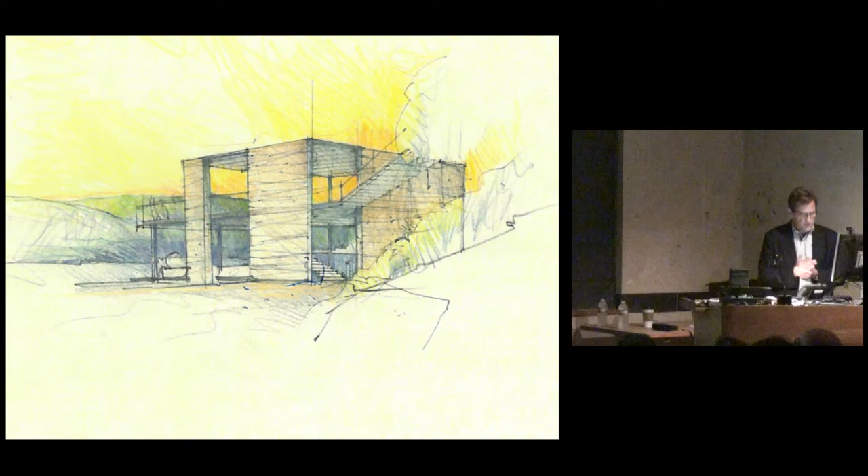On the lake, the first notion we had was that while this image looks very geometric, a simple box, the idea was that this building would be made out of what almost seemed like the detritus of a flood or a rotting stump—something big and kind of imperfect.

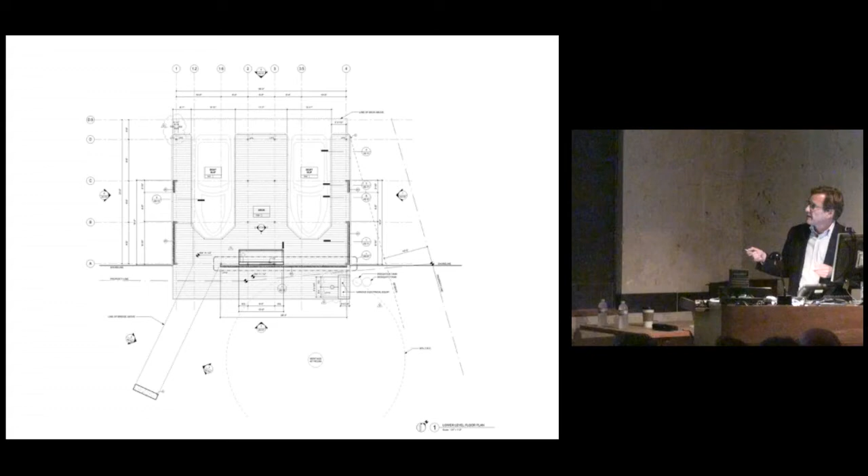The program for it was two boat slips down below. Upstairs there's a bridge that goes to a little arrival spot, and then a kind of living room, and of course a bar that's as big as the living room, which is important, and an exterior space. One of the things we do a lot in our work is make the exterior spaces, especially in climates like Austin, kind of as big as the interior space.

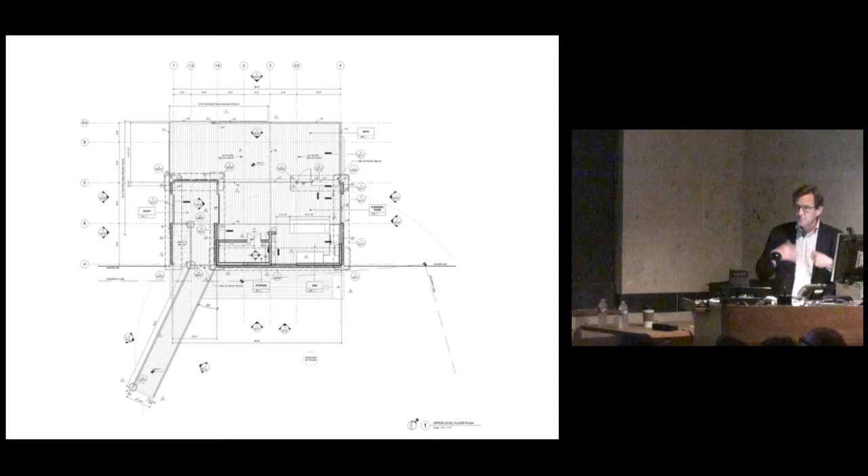What I'm going to walk you through is how this wall and this wall transform to make these rooms all combine as one or separate as distinct rooms.

As you move in, you can see this become another—Chris and I, as mentioned, both worked with Charles Moore. Another notion Charles brought to the table was this idea that buildings are repositories of our energy and repositories of our memories. For Blake and Heather, this was a kind of memory palace, a place they could bring back things from their travels.

Our work starts with rough sketches. I've got a couple of mine in here that just conceptualize the space, and then they go to ones that aren't really much more refined than the rough ones, but these are the ones we begin to talk about our notions with the client with.

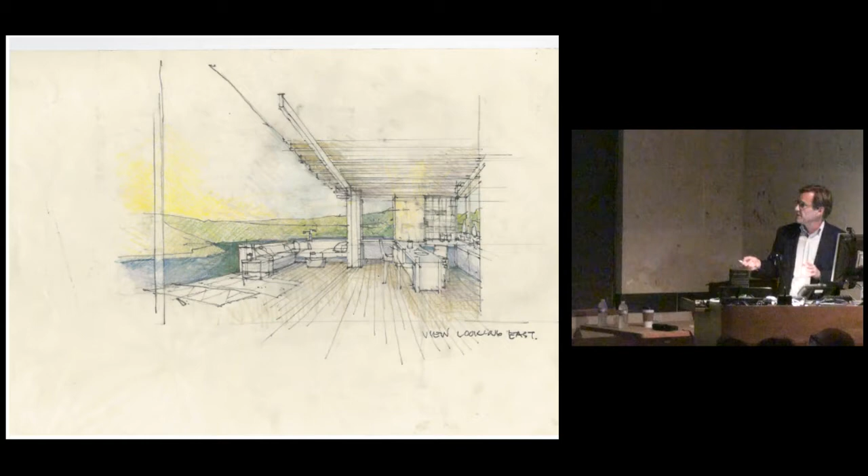This sketch talks about how there's a wall here that can all be removed, so that this can be not a conditioned space, but a screened-in space free of bugs, and then an outdoor space—a simple concept like that. It eventually evolves into the actual construction of the building.

Likewise, the bar I mentioned earlier started with an idea that if you sat at the bar and we put a bunch of mirrors here, you would be, depending on how much you had to drink, unsure if you were looking at the lake or a reflection of the lake. They really got into that idea.

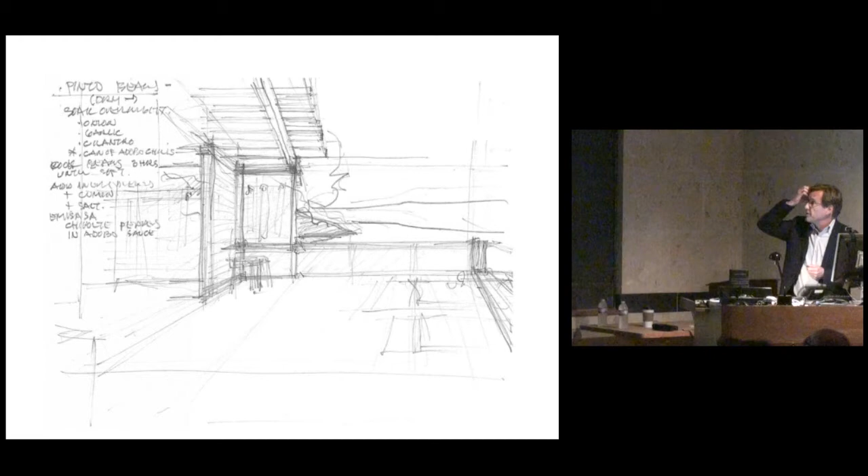For some reason, I wrote a recipe on this sketch for pinto beans. Chris, this is Merce Whittington's recipe—she was telling it to me on the phone while I was going. It's not essential that you do that, but...

About this outdoor space—you can see that in our office anyway, there's a lot of hand drawing, as Chris mentioned.

And that's what produces what we're doing. So we then went through a series of studies of what is this fenestration, what is this rotting stump on the lake, and how's that made?

And we began doing images. Our first notion was that it was willows. The clients didn't like this—they didn't think it was local enough. We thought it was terrific, but there were some qualities of light issues in some of the mock-ups.

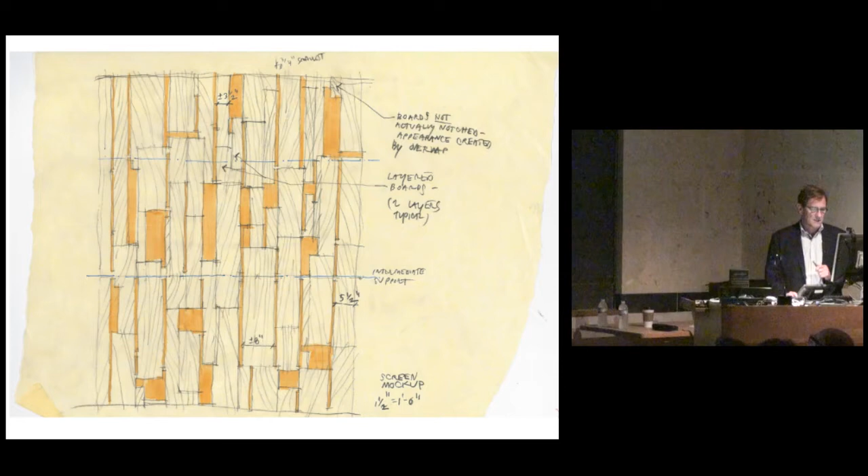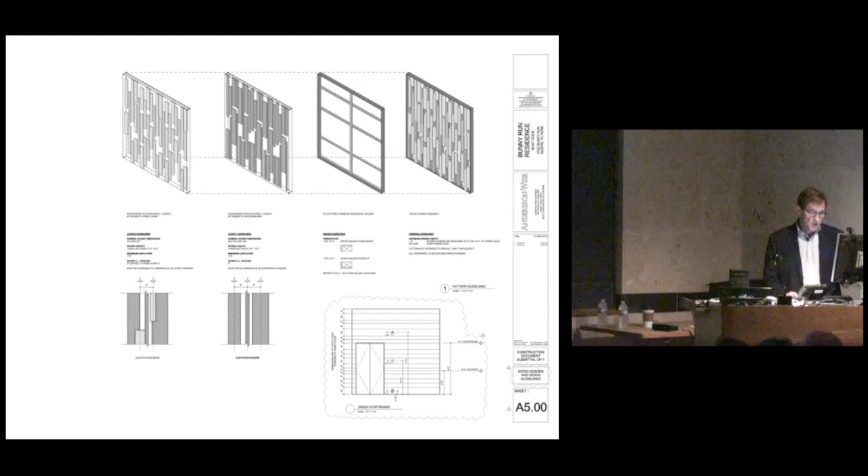And then we went to a larger format of boards, and Chris swooped in as he normally does and made something that can actually be built, with some kind of drawings. Then we did a number of studies on how to construct something like this, to make this kind of wall within a frame and have a screen, things like that. And a number of mock-ups were done.

So I'm showing you all this to reinforce again what Chris said about the process being collaborative. This particular project is interesting, I think, because it's kind of messy. It's not a pure thing—it's more about these little sticks that we found and put together. But in combination, they make for something that's intriguing.

They brought in a rug and said, we want this on the ceiling. We said, okay, well, it's going to rot if it's on the ceiling. So they said, no, we want you to do the ceiling so that it is somehow emblematic of this rug that they found. So we had an artist, a local artist here.

And they came in—this is again part of that collaborative process. This ceiling became the repository of this kind of human energy.

So they went in and literally did the rug on the ceiling, and we debated while they were doing this in our office whether everything was being ruined or not. We determined that it wasn't that precious, and it wasn't ruined. It was an exciting way to finish out the project.

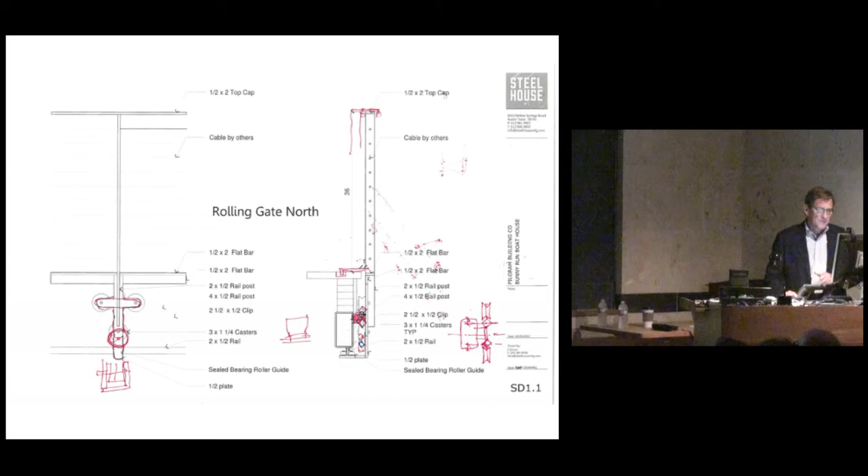So I mentioned the gate earlier. These kinds of things—we love big, movable devices in our projects. We know people that make them well, and so the rail on the edge of this boat dock all slides back. This piece right here slides out to the corner, and the other one comes to join it when you want that, and it moves back so that people can enjoy an open edge for drinking and jumping. The whole thing becomes enlivened in that way.

And I mentioned the screen before. This is from the lake with the room opened, and then it can all become a big screen on the porch if you want to spend the night down there with no bugs. So a couple more slides just showing what the day's end is for this particular project, this particular memory palace on the lake. Wendy.

I really enjoyed working with Chris and Arthur and Mell on this semester, and it's such an interesting thing that the process of creating the studio is as collaborative as the sort of work that's happening within it. Whenever you say group project to students, everybody kind of shudders and pretends like they can't see you, and pretends they can't possibly find anyone in the room to collaborate with. And yet the creation of this studio, us just sitting together to figure out how we were going to create a meaningful semester for the students, was really interesting, and I think spoke a lot about how we all work—that there's an idea, you feed off of it, it generates, and it becomes something that has legs of its own.

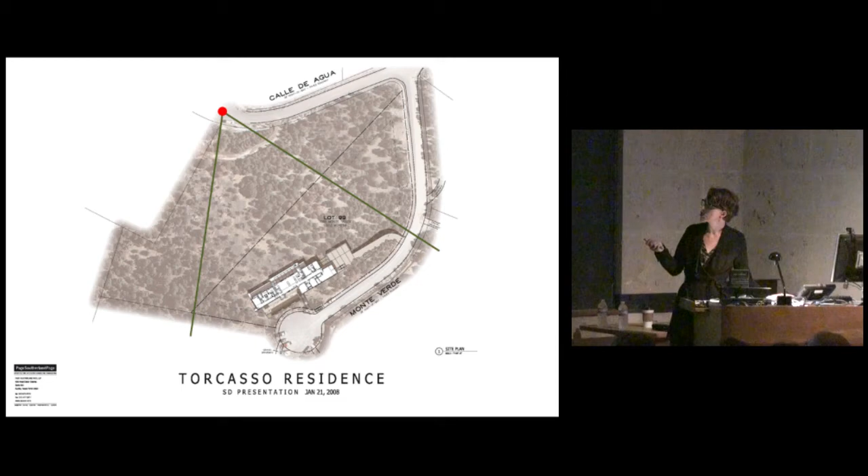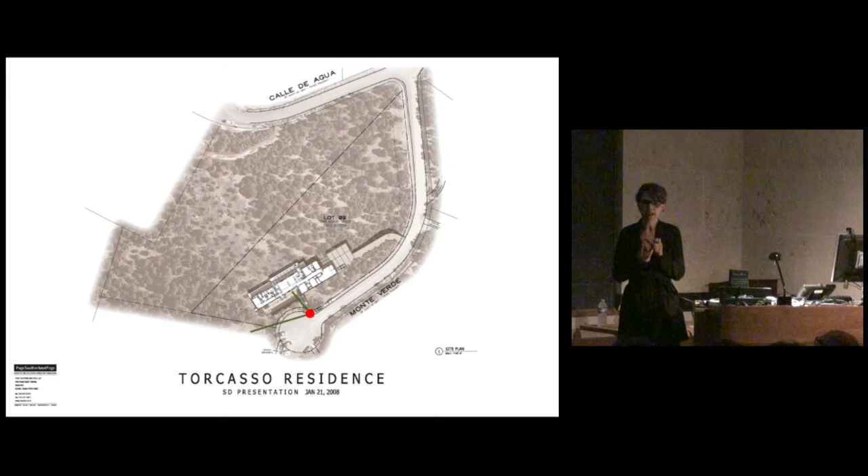This is showing you coming up the road, looking at the long side of the finished house, just to give you a little orientation. This next image is taken from the top, looking down at a small courtyard. What you'll see is this sort of long bar that's set on the hillside and in the hillside, organized by two main volumes.

I came onto the project after part of that language had been created. Our office was collaborating on the interior architecture and design at the time, before I rejoined Page. But this big notion of looking through and out was really, really important.

One of the first notions was there's this beautiful hillside, this fantastic long bar of a building, these absolutely beautiful conceived volumes of rammed earth. And really, you almost want nothing on the inside to interrupt what's happening with that architecture.

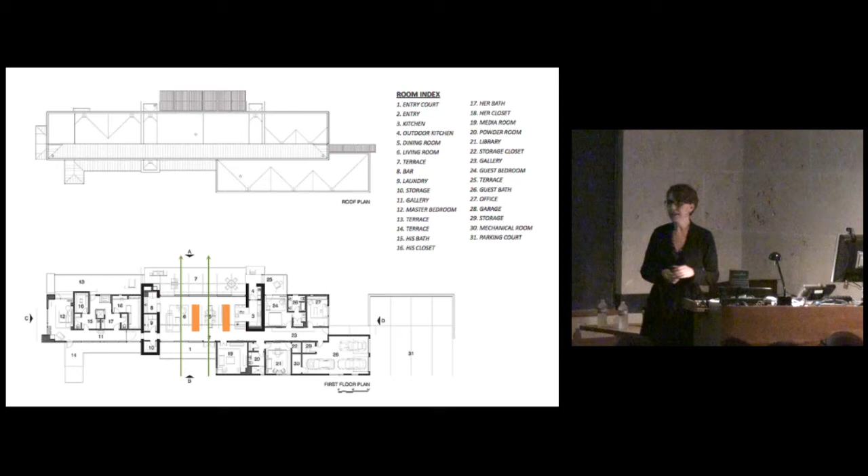The other interesting thing was we had a client who had unbelievable faith in the team, but they also had some very particular things they brought with them. The first person on this project was the lighting designer, selected because they had an art collection incredibly important to them, and some furnishings they were really invested in that were incredibly present kinds of things. So the first person on the project was a lighting designer, to make sure each item was perfectly lit and celebrated in this new home.

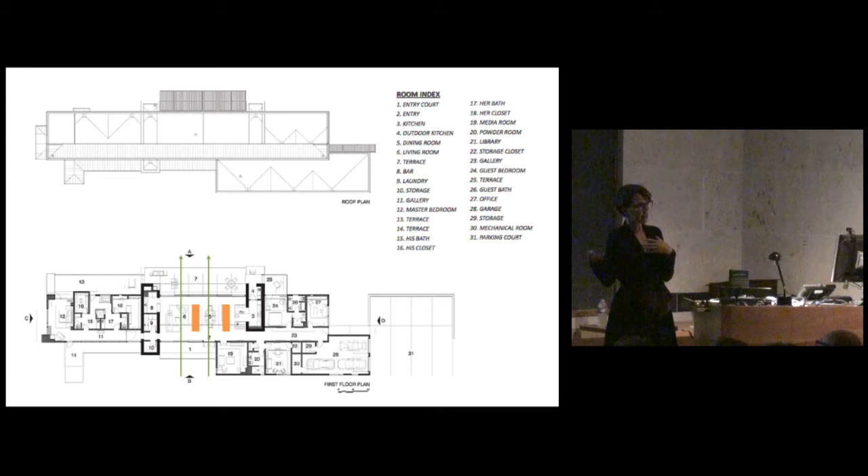But they came from Dallas and were moving to Santa Fe. I don't know if you can connect those dots, but sometimes the things in one place that's quite urban don't necessarily translate to that other landscape. So the other part of what we were doing was, one, not messing up the architecture, but the other was to help knit together this life that this couple had in Dallas, and their art and their baggage and all of their investment there, with this really beautiful home on the hillside of Santa Fe.

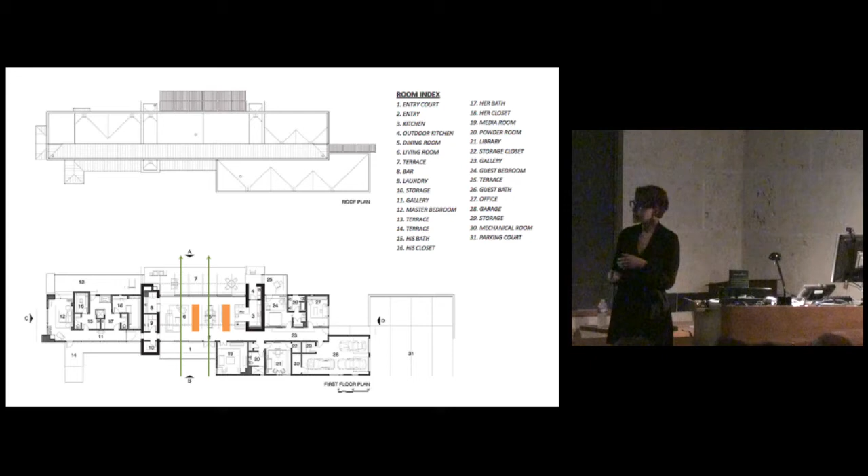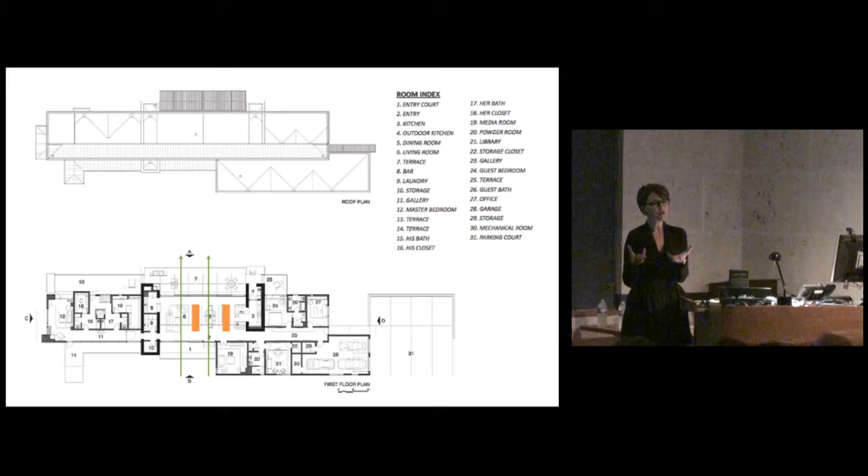That was this interesting kind of collaboration we had with the architecture and with the client, who wanted to give us a really strong voice in the rest of their life in this home, but also had a lot of things they were really bringing with them.

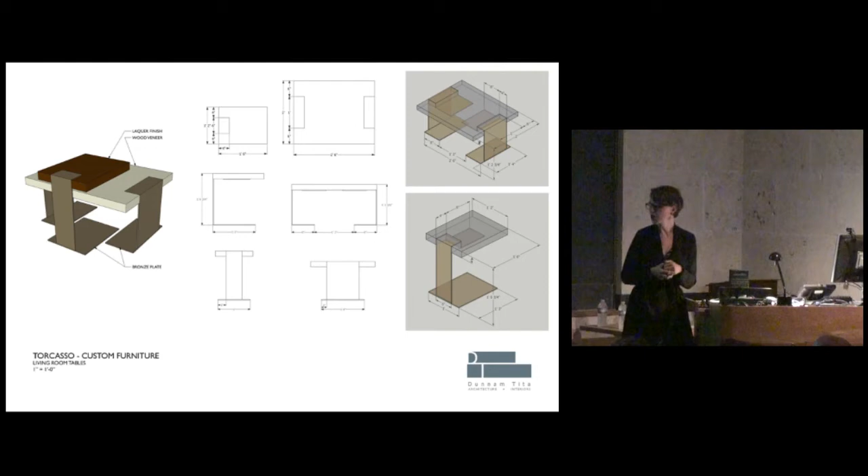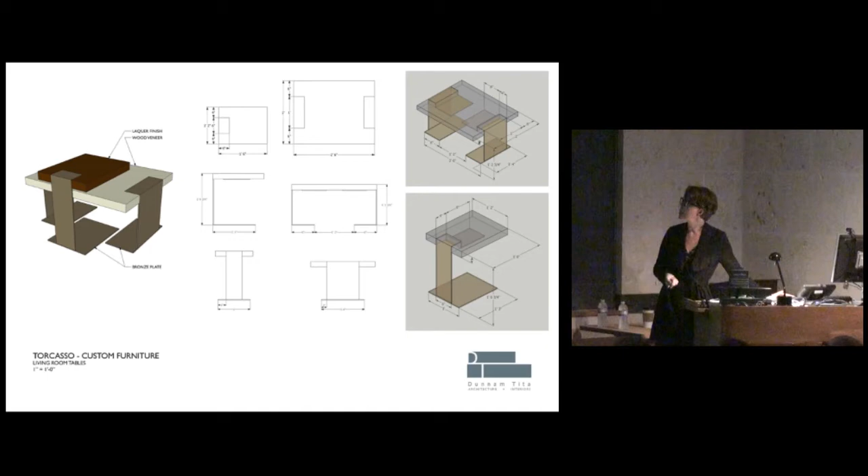It starts with those wonderful rammed earth volumes and the art volumes, and then moving on from there. So we really tried to treat these as a kind of seamless, thin line with pieces of a volumetric table within. And so we have this suite here and this little table to the side of it that we're really happy how they collaborate with the other pieces of the architecture.

The next thing is this kind of funny lamp, which is simple, it's just a really beautiful piece of molded wood veneer. It's called the air lamp though, and when we got it in our office, we just wanted to gaze at it. It was so pretty and sculptural. And then it was just too light and flimsy and it fell over. And that was really unsatisfying.

So we thought, if we took a toilet paper holder and peeled it apart, deconstructed what that shape is and reconstructed it, and then had somebody mill that out of metal and reattached it, wow, it's so much better. In the end, that's a much more satisfying thing to see in this space and a much more quiet connection than the original. That level of energy just helped it be more quiet and pure within the space.

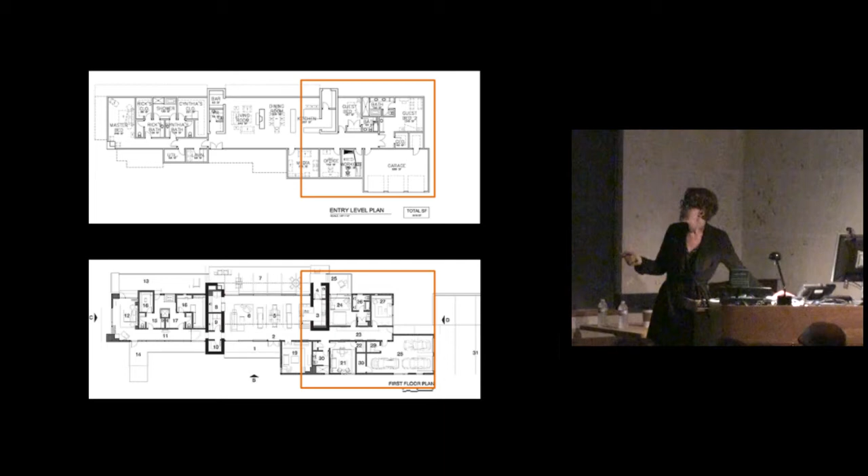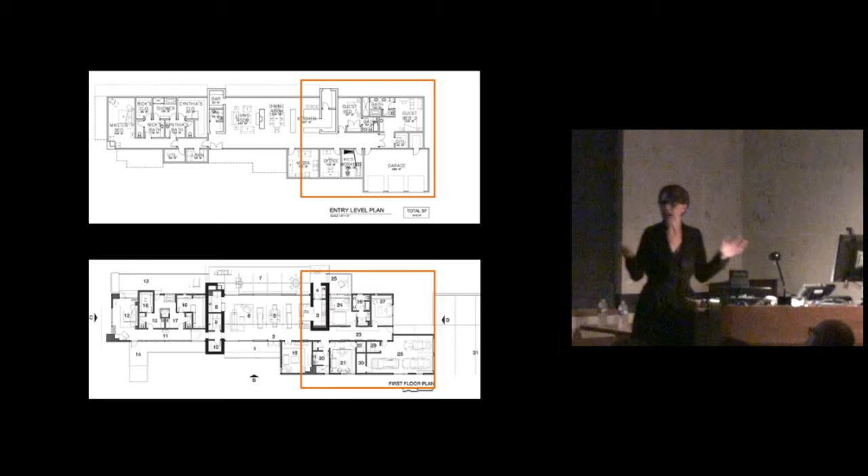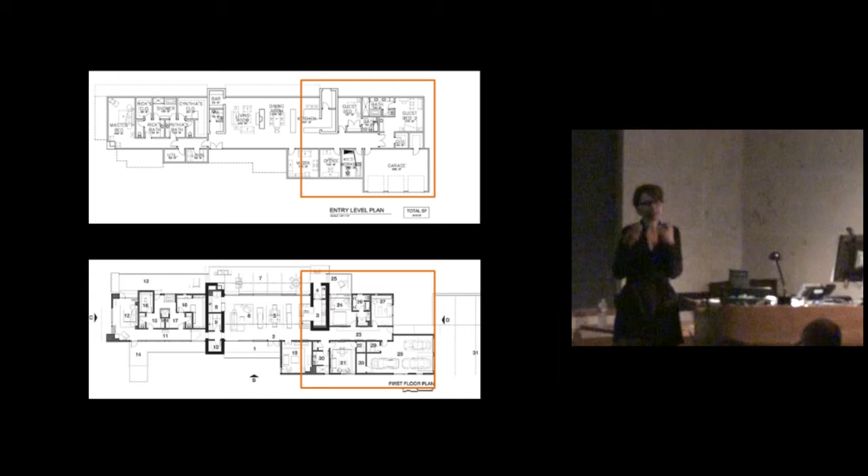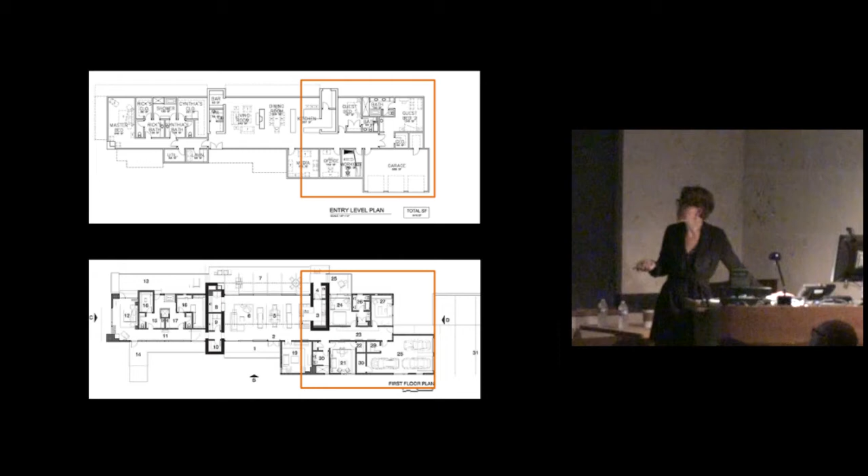We did some reconfiguration also looking back at early ideas. There was this series of rooms that, when we got down to it, had a room full of tchotchkes—but not really. Really beautiful small bits of art that there was nowhere else for in the house. They loved them and cared about them, but didn't want them anywhere else in the house. They wanted a place where they could go and celebrate and enjoy those pieces without them taking over this new world.

This actually has a kind of media security closet—there's a Wii behind it. But mostly it's about these little moments to celebrate this little collection that they had.

Then there was this red lacquer box and this rug, and the idea of, well, what's the new piece that needs to go into that room? So this is another piece we worked on with Mark, which was really about the lacquer table, if you will, as a place to occupy that room.

Again, just looking at some of those other details and how the volumes really play out to celebrate what's beyond. Similarly in the art collection, we had to hold it off the wall so that this light feature the lighting consultant obsessed over—this sort of 60-foot long light trough—wouldn't create weird shadows with the art. So we fashioned a 3-inch spacer to the wall, and all of that worked out.

Again, sort of obsessing on the quiet, all of those little details kind of working together to really celebrate the surfaces of the architecture.

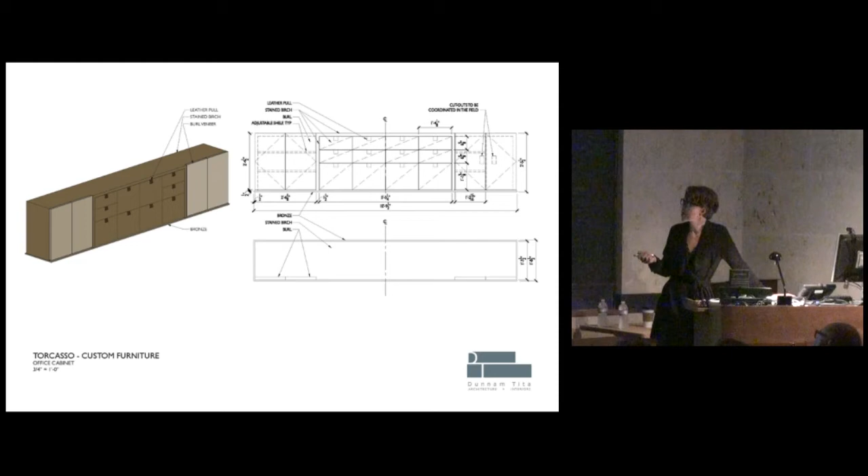Working through in his suite, he really loved bronze. This is the heaviest, tiniest desk you will ever see, and this is a piece we worked on with Mark, who beautifully built it.

One of the details to obsess on was this leather pull, which we wanted to be very satisfying when you open that weighty drawer. Mark sent these different ways of connecting it, and while there's something kind of satisfying and tectonic about one option, in the end we quieted it down, because you really wanted to notice and feel the leather before you notice the connection.

In the end, it extends to every part of the house for us, making sure that the thin line of this whole space was really celebrated, even in the exterior furnishings. Paola Lenti is this fantastic Italian designer, and these are really thin ribbons of steel that she covers, which really allowed the eye not to get trapped by the furniture of that space.

So in the end, it's a lot of pieces that work in concert together. I think when we collaborate, these for us were about how to be quiet and not mess up the architecture.

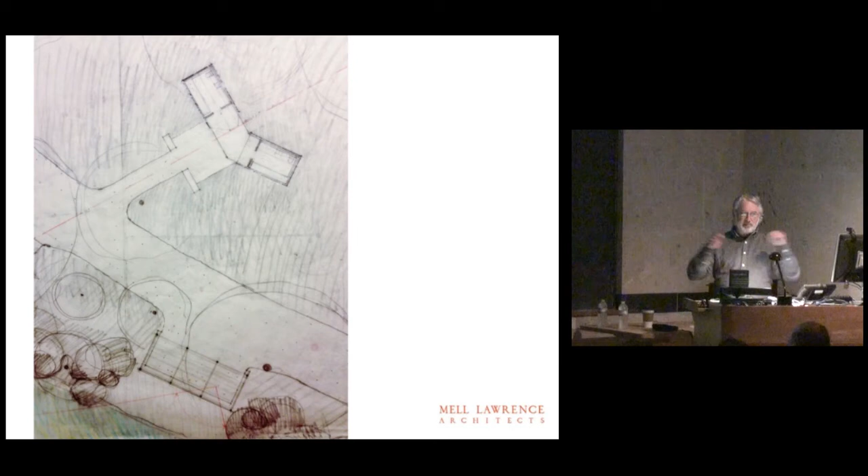Then we cleared out the shrubs down there by the lake, which we didn't know whether that was going to happen until the end. You ask for things, and you don't know whether the Parks Department's going to do it, because they're just one entity, and there's a lot of entities, Austin Energy, and any project, the big collaboration grows to people you have no control of, and you're just wishing and hoping.

One of the other programmatic functions of building in a park is it has to be incredibly indestructible and durable. You have to think about materials and methods of construction that can withstand, in this case, floods and wind, and mostly people trying to take it down. So everything, even the door, the sink, the toilets, are unbelievably expensive because people flush unspeakable things down the toilet, and you can buy a car with what these 2 toilets cost.

This was an early sketch demonstrating how we had this plan here. I don't know if you can see it. We had this long concrete bench that wrapped around, a sink and a toilet, and a big place for a bicycle. We thought you could lay down and rest or change your baby or something. They really didn't like that at all. They were saying other things would happen.

We were arguing that, well, if I'm going here, I don't want to see it. So the concrete little bed thing got shrunk back to a little tuffet in the end. But this is a closer picture.

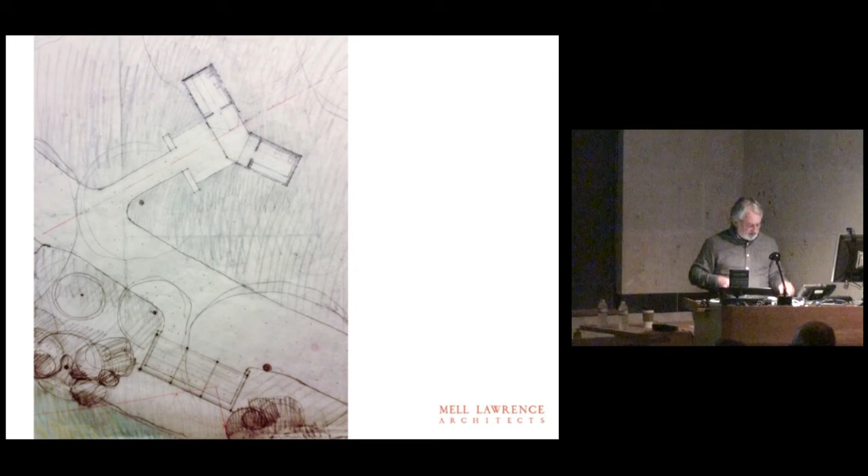We tried a lot of ideas, iterated like crazy, thought of all kinds of wild things to do. In the end, we made these two pup tents out of steel and arranged them in a little fun place, with all these openings that would allow ventilation, which was one of the requirements, and there was a whole issue about safety. This was the very technical drawing that they built it from, but it had these two bulkheads that were concrete, and then the rest was a big steel wrapper, and Chuck's in here.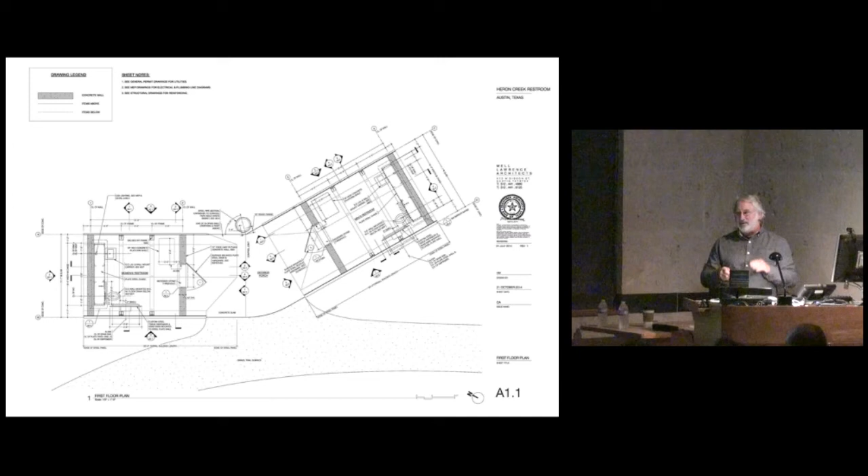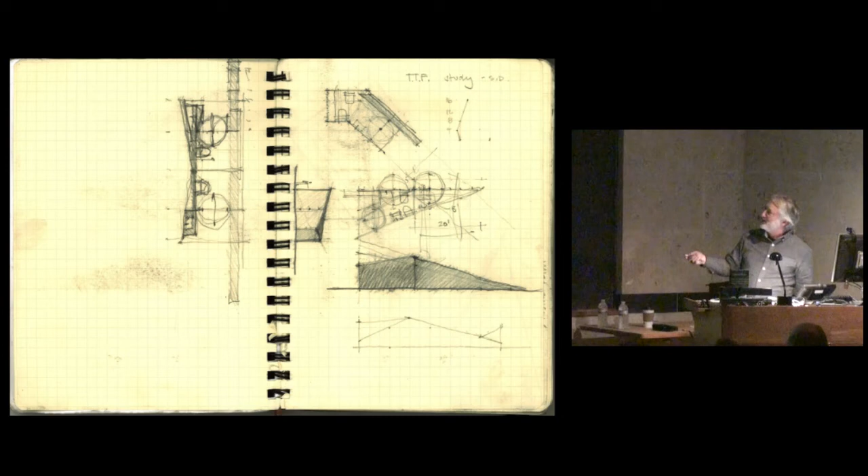I should get Chuck up here, because Chuck, talk about collaboration. You know Chuck Naeve, the engineer? He's a great engineer, and we met a million times, and I was pushing him about cantilevers, and I don't care if it deflects, I just wanted to hang out this far, and it didn't happen. Chuck would be very calm and go, well, it can't be done, and he'd do it. But he made it happen.

This is just an early sketch. This was an example of like a million things we did, but I was already looking at sections and this wacky shape that was not practical. But when you're going through and designing things, a lot of times you just have to, like, you might be excited about part of it, but the rest of it you think, it's just not working, so you got to throw it out and move on.

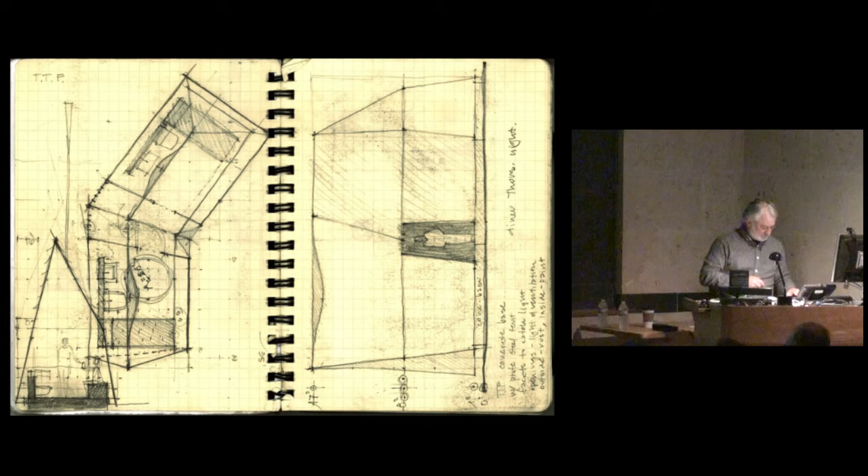That's the iterative thing. And this is the first sketch where we started thinking about steel with this concrete base. And this was a much closer thing. You kind of went in this little opening and there was holes in the back. But the thing wrong with this was that it was not safe, and people could get in there and jump out at you. When we're working sketches, this was just a grid pad where I was working out some detail that we didn't use. And then there was a trace paper overlay, so I put those together too, just to show you how we work along the way.

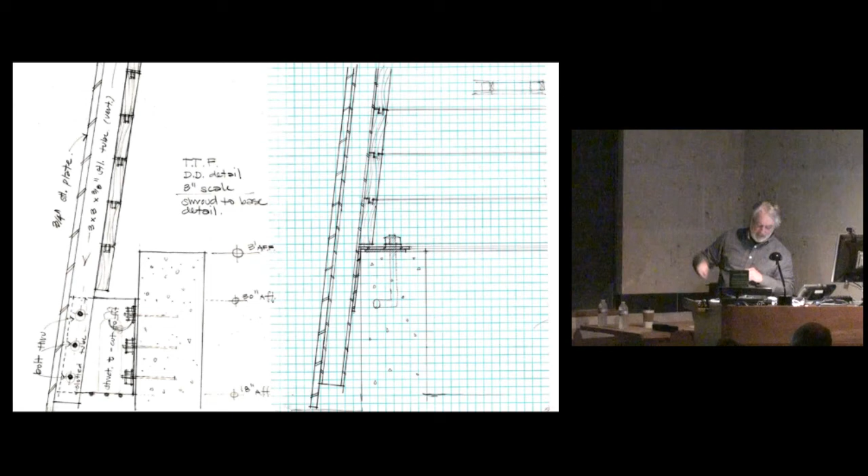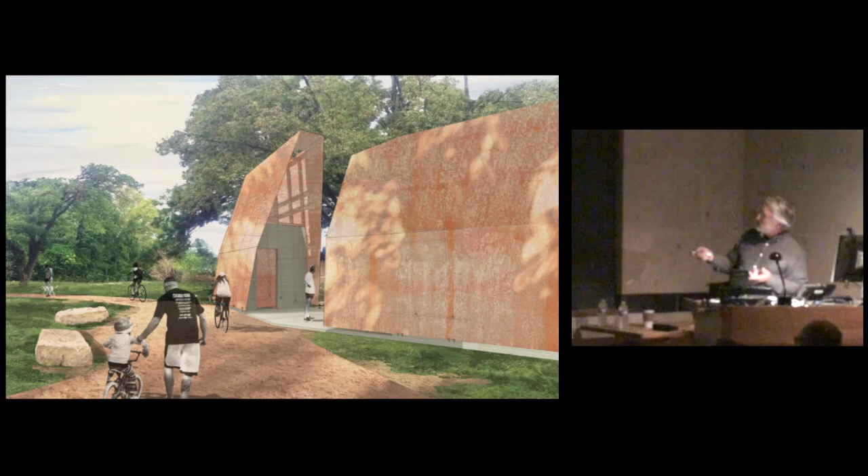This is the kind of stuff I bring in and talk to Chuck about. I don't know what that is. But this was an early rendering to get approved with the Parks Department. They were sort of the overseers over here, because the Foundation just does these things, and then they had set it all up and then they give it to the Parks Department.

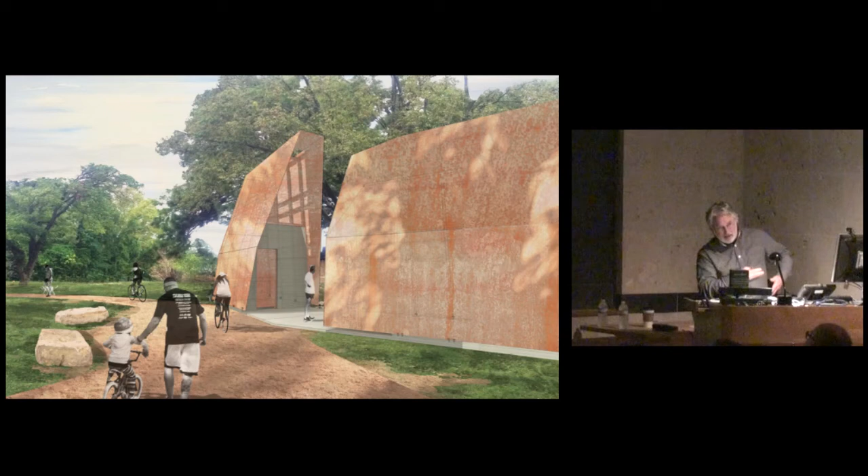And the Parks Department is still involved as a collaborator. They have concerns about maintenance and where the trash is going to be picked up and all the security things. We lifted the steel up off the ground so that if you're inside, you could see if someone was lurking outside, but it would be too low for someone to get down. It'd be obvious if they were sneaking a peek or something. So most of the openings were high. They just went round and round.

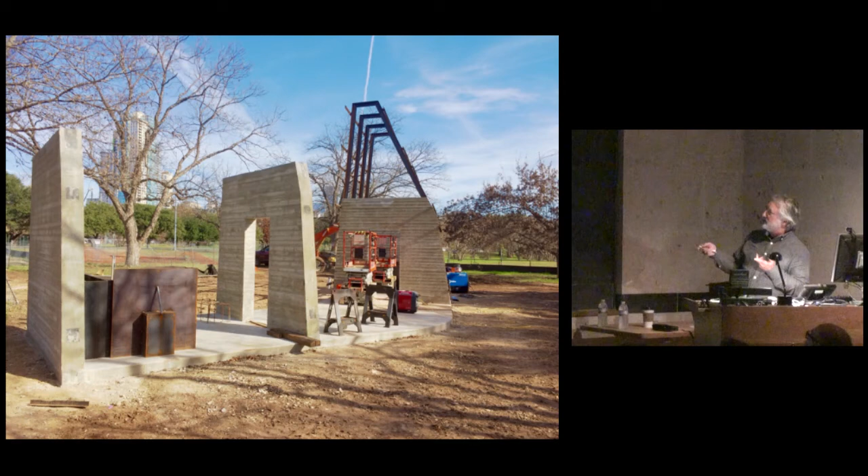I'll get right into construction. The concrete bulkheads were to create shear in this opposite direction because we had this flimsy steel container. And originally I wanted the steel to just be plate steel, nothing but plate, and it worked in the museum board model. Why can't it work in reality? And it was getting thicker and thicker and thicker.

I think Chuck said maybe if it's 3 inches thick or something, I don't know what it was. But we ended up having to put this frame in here to hold it, and we had to deal with the realities of Newtonian physics and stuff like that. And it was hard for me to put all that stuff in there because I just wanted the pure steel. But things like that happen.

A million things happen. This little thing, it looks like, if you look at the other side, there's a little hole for a little rectangle for the toilet paper, and it became this huge construct because the laws changed about accessibility, and you no longer could deal with just a rail to get yourself up and down on the toilet.

You had to have something to push against, and the law didn't anticipate sloping walls. So we went round and round, and we ended up with this thing. It looks like Santa Claus, if you could hang a stocking on it, and it's just got toilet paper in it. But it was all right. We could control the proportion and things like that.

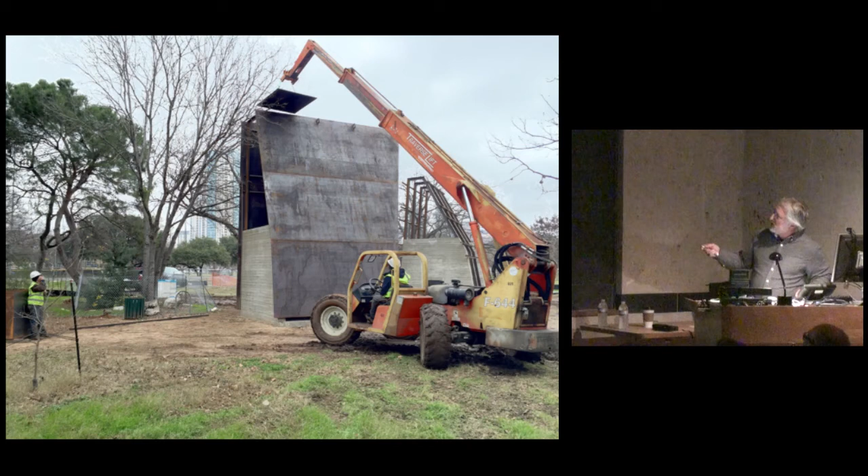This is a big crane. We worked with Sarabi Studio, a steel place in town, and they were awesome. They sort of took over as the GC, frankly, and it made everything work. They had these huge, heavy plates of steel that they had to lift and set in place. They had ground down the edges to match, and it's amazing it came together like this.

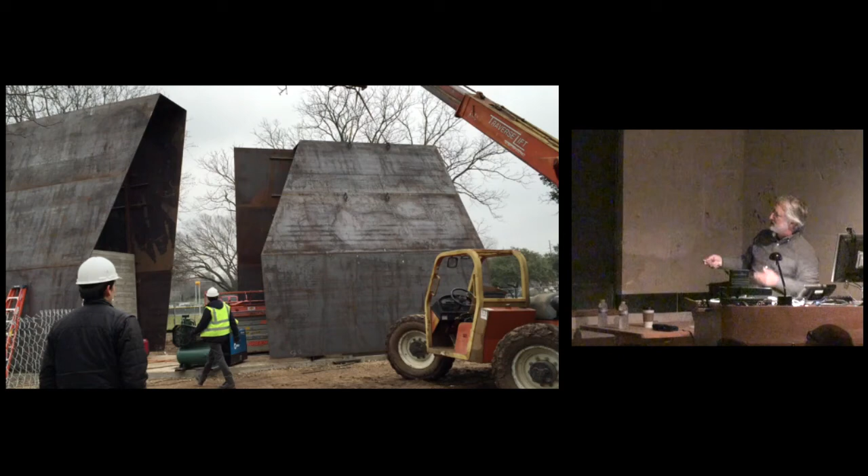We wanted to use this plate steel so it could just... I think this guy's about to move. We have some great movies of this, but there's not enough time. But they lifted these things, and it was wild. I was glad I caught it, was out there every once in a while.

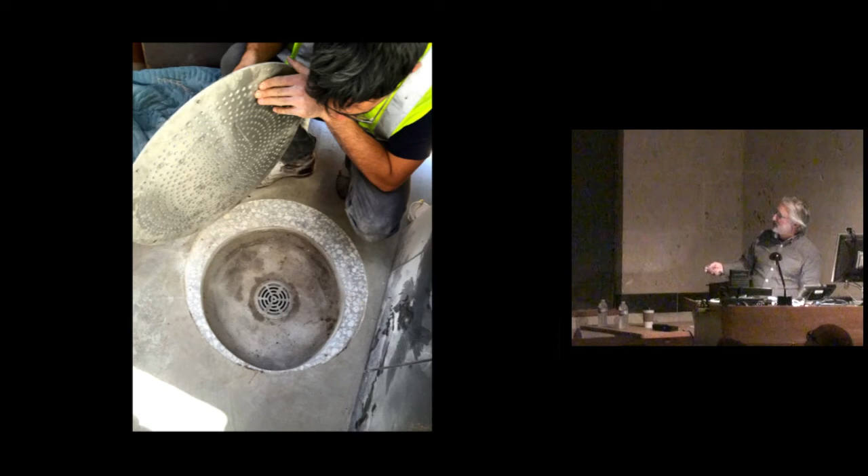This is an example of what happens in the field. You ask for a circle to be poured in concrete, and it ends up being this sort of amoeba kind of concrete thing. You're thinking, well, this looks awful. So Payam Sarabi ground that out, and then we designed a plate to drop on it. Now you don't know that the drain is really whack. But you run into things like that all the time in construction, you just have to deal with it. It's another collaborative thing where everybody gets together and decides how to solve the problem.

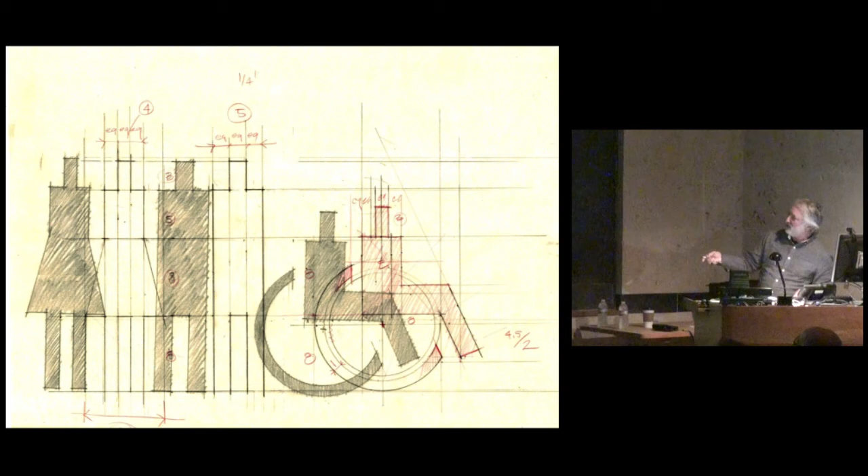This was more fun - we were going to design a custom set of men, women, accessible, transgender signage, all this stuff, but they didn't like it, so it just went away. That happens too. You just go, okay, whatever. And the regular guy's going to - there used to be a normal person here, but it's probably in somebody's house now. Then in the last minute, they were like, those things didn't come in for the Braille, so we'll just make these cheap things and stick them up here. That happens too. I'm just trying to show you what it's like out there.

You just try to make the best of it.

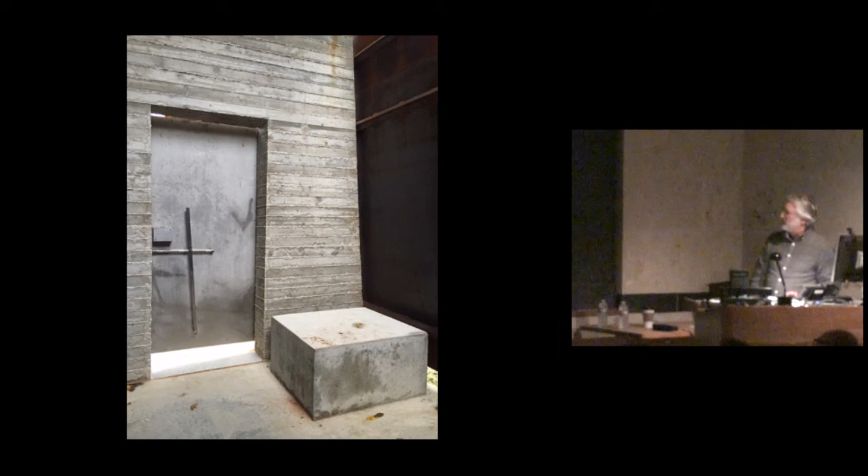This threshold is a little piece of marble, but again, it makes a difference. It could have been concrete, it could have been steel, but we chose to do the standard old-fashioned marble with a little rounded top, because some people will notice it, and over time it'll get worn from foot traffic. Even though it's hard, it'll have a saddle in it in 30 years, and that'll tell a story of its own, which concrete wouldn't. Or you can go carve initials in it.